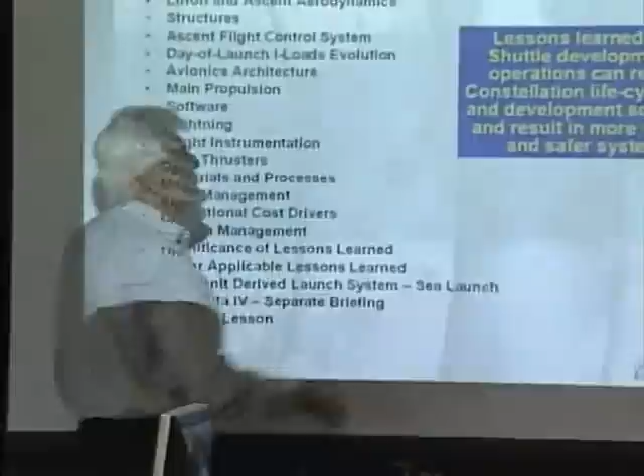The whole idea in this thing is, these lessons learned, hey guys, you NASA paid for it already, for these painful lessons. Don't pay for them again. This is like a map to a minefield. I come here with all the bloody legs, and I said, find your own mines to step on. Don't step on the same mines. So that was the whole idea, to give you a little bit less expensive, a little more reliable, a little safer system.

But if you ask me, did it make any difference? Hell, I don't know. Maybe a little bit.

Okay, so let's go. So mainly problems, some success stories were included. And by the way, I'm talking about things I knew about. Some people say, well, why don't you include station? Well, my involvement in station was peripheral. Why didn't you talk about Apollo? I said, well, hell, I was in Poland, minding 2 cows that we had in our little farmette, so I don't want to talk about things that I didn't experience. I'd rather limit my conversation to things that I know about.

This is shuttle and a little bit of Sea Launch, because Sea Launch brought some things that we could have learned, but I'm not sure we have. I'll probably go to my deathbed one day thinking I should have given more of these damn briefings to NASA, but okay, let's go.

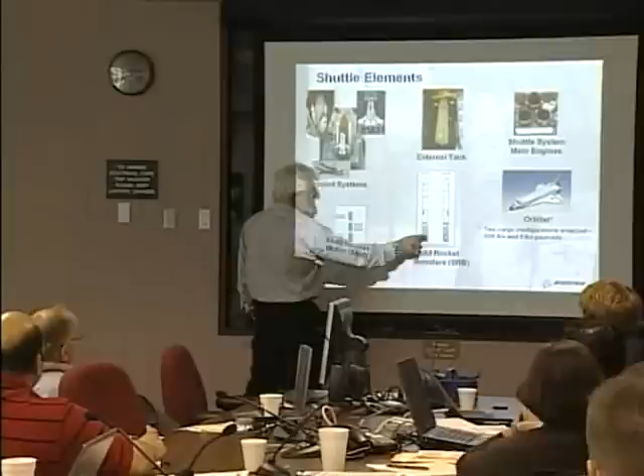If you look at the shuttle elements, there is some real commonality with Constellation. The booster, when you ignite it, you have the same physics happening as it did on shuttle. It's a different configuration, but there are some things that are very common, and the lessons are very applicable.

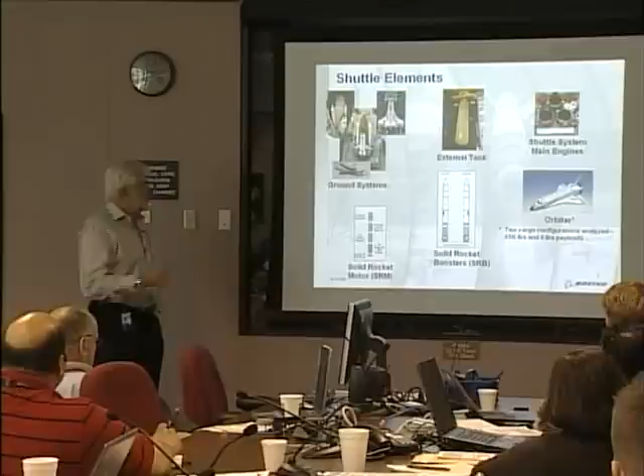So, okay, let me go through the first technical area I'm going to look at, and this is from my original briefing. We have the finest aerodynamicists from Rockwell and NASA. We did not have 10 centers involved, but we had Marshall, JSC aerodynamicists, and our own. So we do all this analysis, we do all this testing, and then we fly.

And we actually broke the vehicle in one area. We had this huge overpressure wave hitting the vehicle, and we thought we had it attenuated. We had water injection, and so we actually - there's a 38 or 39-inch nitrogen tetroxide tank in the forward fuselage where we buckled one of the struts holding it because of the dynamics of the vehicle response due to this overpressure. We did not fail it. Can you imagine trying to fly ascent with this thing rattling in there? I was kidding - they're saying God must be American because we screwed up, but he protected us from our ignorance.

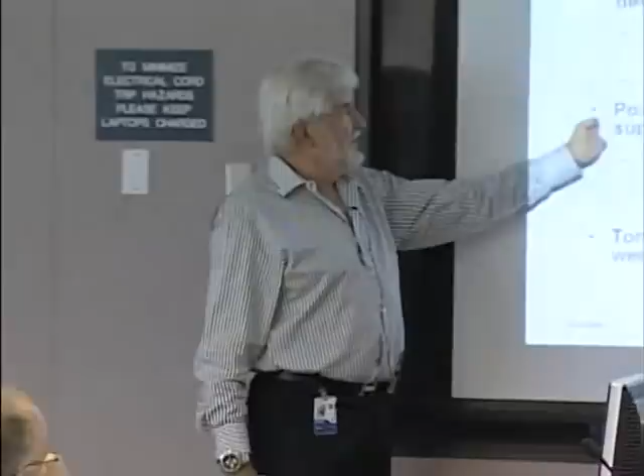So anyway, we survived the flight, we landed, and then we found that our finest aerodynamicists simply misread the source of the ignition overpressure.

In typical response to a problem, we created this wave committee with NASA and contractors. We had this model at Marshall. Marshall was involved very much, and I think you'll see this lesson is used in getting ready for the Ares flights, simply because transferring information is sort of like playing a contact sport. If you're involved in it, you get the knowledge. If you're not involved, it's up to you to go to somebody's shelf or computer and extract it. Marshall was in it, so that lesson is with them on Ares. But we finally fixed it.

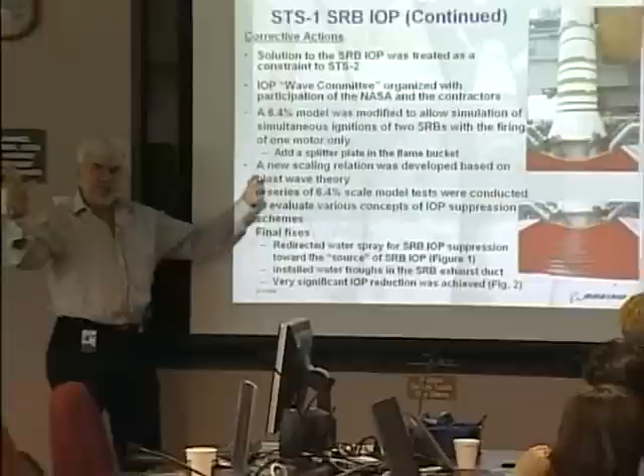We put those water troughs filled with water that absorbs some of the thermal energy and also the energy from the wave, and we reduced it. We solved the problem between STS-1 and STS-2.

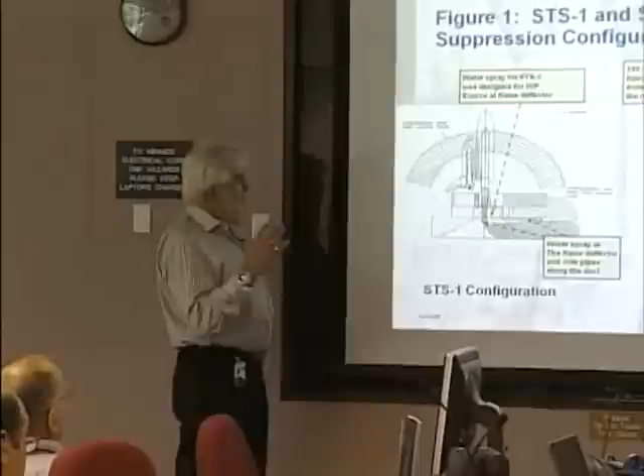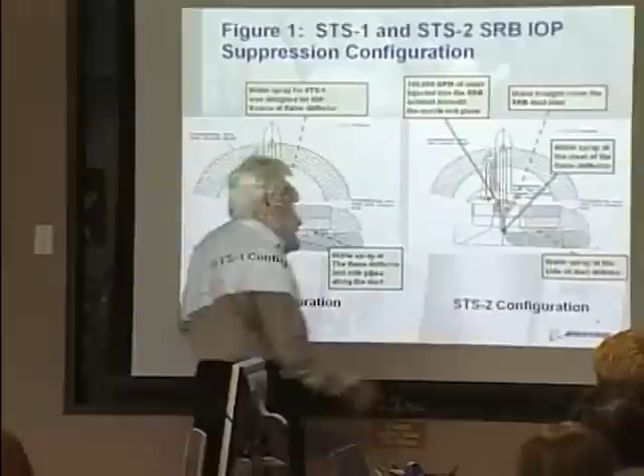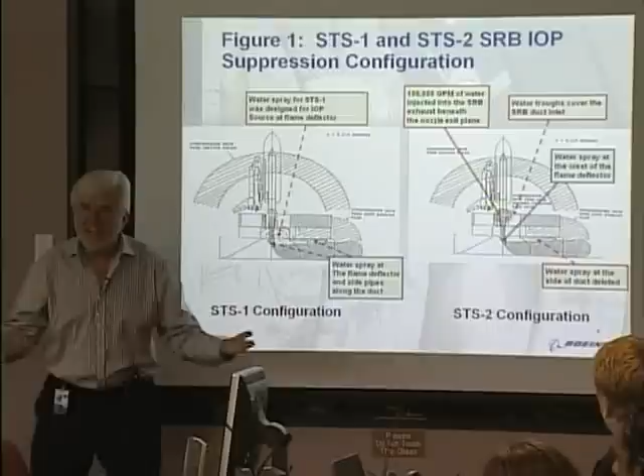But the key mistake was that all the analysis showed the source of the ignition overpressure wave was going to be at these 90-degree turns, where the gases hit the floor and turn, coming back as a big wave. Well, STS-1 showed us the source of the ignition was different. We had all the water injected in the wrong place, and we almost broke the vehicle. Once we learned the source of the overpressure wave was just at the exit plane of the SRB, our finest aerodynamicists looked at their shoes for a while and concluded, yeah, we just screwed up. We were wrong.

Another thing is a compromise was made. Tomahawk was a little solid propellant rocket used to characterize this, measuring PC rate rise and what it means to aerodynamics, the pressure wave. It turned out that the little Tomahawk motor had a different characteristic from SRB. But it was compromised, and people said, well, that's all we've got. Well, what we had did not represent shuttle, so we almost broke the vehicle.

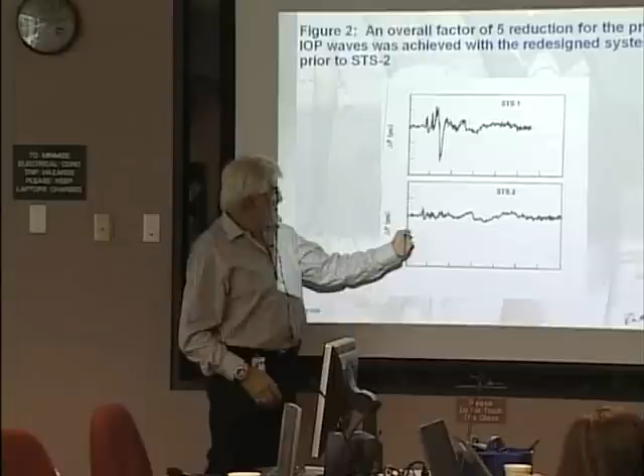Okay, so let's go past it. This just shows you, somewhere on the body flap - export compliance people had me remove some scale so some enemies don't figure out what we did - but anyway, this is STS-2, pressure across the body flap, and this is STS-1.

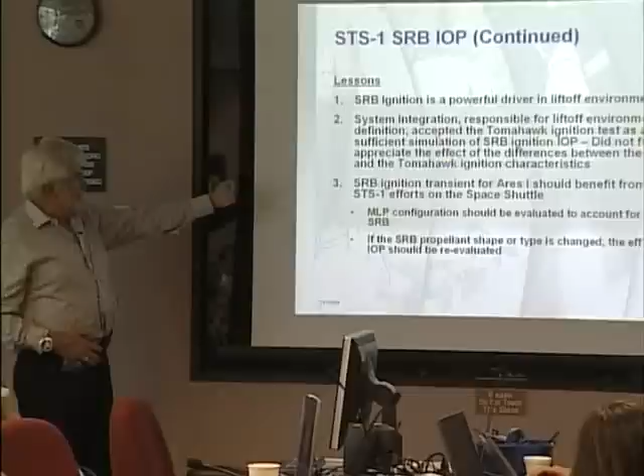So it's a big driver in lift-off environments, and for Ares, it should benefit from what we have done. And if you change the MLP or propellant properties, you've got to do something, you've got to relearn this thing. So let's take a look at how I see it on the next chart.

I think this contact sport of us playing with Marshall guys had them continue MSFC involvement, so they know about all of this. For example, I know that for Ares 1X, which uses the same MLP as we flew, they're actually going to go with the same protection - a 4-segment SRB, water trough, water injection in the same place. So that piece of knowledge was transferred, simply because people were there with us. Utilization of legacy hardware makes it easy. So that lesson learned is applicable and it's being applied. That's easy, that's a good one. Let's go to the next one.

Okay, another one we also had in STS-1, it was a big deal that could have failed the vehicle, but it didn't, because somebody was looking after us. Remember that? We had plume simulation trying to get the aerodynamics at ignition and during flight. A compromise was made - hot plume test is expensive, you can only do it for short periods of time because you burn out your facility. So they say, well, cold plume is close enough, probably, most likely. That's another aero thing - I hope none of you guys are aero guys thinking I have grudges against aero guys.

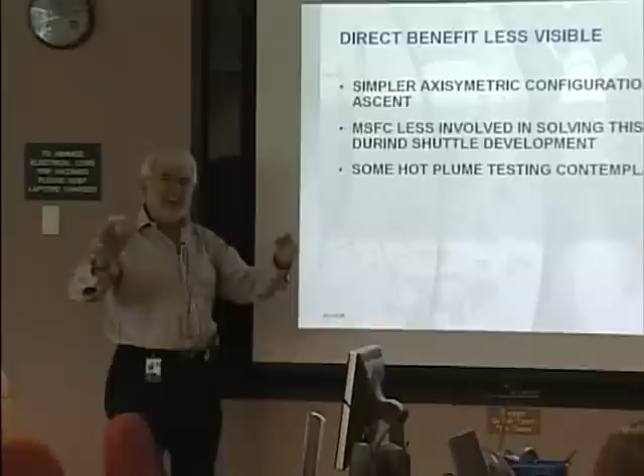So on the next chart, what I see is, okay, you've got a simpler axisymmetric configuration on Ares, so it's maybe less critical than shuttle. Marshall is a little less involved in this, so on the Ares side I don't know how well they are doing learning from our experience, but I was happy to see, because the Orion contractor is a JSC contractor, and JSC was down in the mud with us when we were working the problem.

I think hot plume testing is contemplated on Orion. So at least the way I see it from my knothole, the transfer of this experience through JSC to their contractor has occurred. It's not all that clear how it is with Ares, but there it's somewhat less important. For whatever it's worth, I gave my briefing to the guys on Ares about 3 or 4 times, so hopefully they will do enough, considering their challenge is a little less.

Go ahead, next. Okay, the next one is structures area. Go ahead, next chart.

This is one thing, and I don't want to claim credit for shuttle teaching constellation anything here, because sometimes right things happen and they look correlatable, but they're not. They're just smart people doing the right things. But throughout shuttle development, especially orbiter, we were always maintaining 1.4 safety factor, and we never had any additional margin, our structures guy, loads guy, dynamics guy.

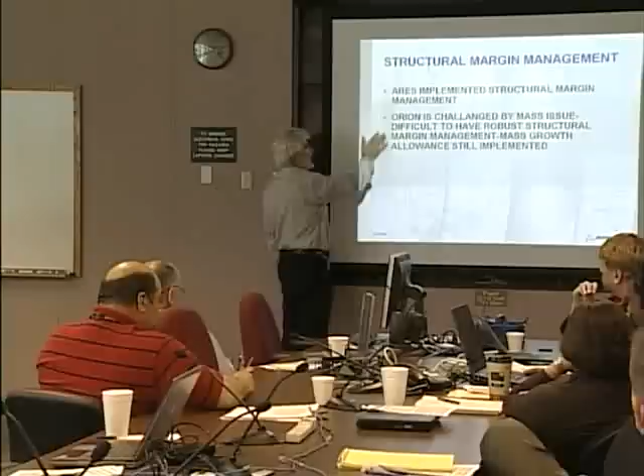And Orion is in a tougher spot because they're really struggling with weight. But regardless, they actually do have this mass growth allowance implemented, which we didn't have on shuttle. So, if I was a little more arrogant than I am - I'm a pretty humble guy - I would say, oh see, they learned from us. No, I don't know if they did, but they are doing better than we did in structural margin management.

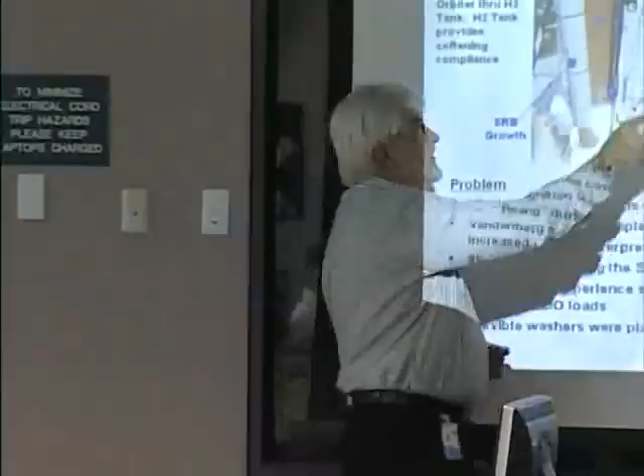Okay, the last area is lift-off loads, and this is just in a nutshell: what happens is, when you ignite the solid, the SRB grows instantaneously, a matter of milliseconds, growing by nine-tenths of an inch. It just grows because of the internal pressure. And so the way you accommodate that growth, the MLP deflects a little bit downward, and the rest of it jerks the forward interface.

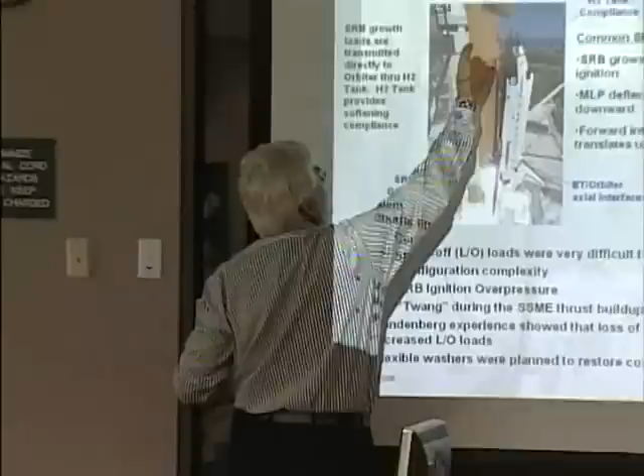For shuttle, this load - the forward interface is in front, this is where you take axial load. So then you go through this big hydrogen tank spring and dump these loads to the orbiter. So the orbiter is being propelled by these growth forces indirectly.

Question about the last one - I'm guessing the real lesson from that factor of safety discussion was, over time, as you saw more data, you realized that your models weren't as well founded as you thought initially, and you miscalculated the loads and the factor of safety, so you had to keep going back and adjusting.

Right, yes. So the lesson learned maybe is that this reliance on physics models and analysis, and how there's so much uncertainty in there, and that real data and experience helps you realize that. Yeah, that's another way to look at it. You have a right way of looking at it, I just said it my way - but besides being wrong for a reason...

I mean, one reason is because maybe you are ignorant, you didn't do that stuff right. But another thing is that as a program matures, you do testing, and you discover things in tests that are a little different than expected. So you tweak the models, and then you do aero testing, wind tunnel testing, more sophisticated wind tunnel testing. So there's a growth of knowledge and precision, and all of that cumulatively affects how well you predict these loads. There's probably more than one way to state the lessons learned.

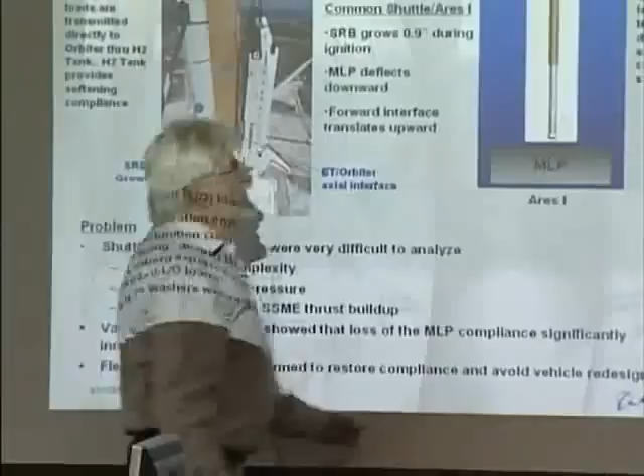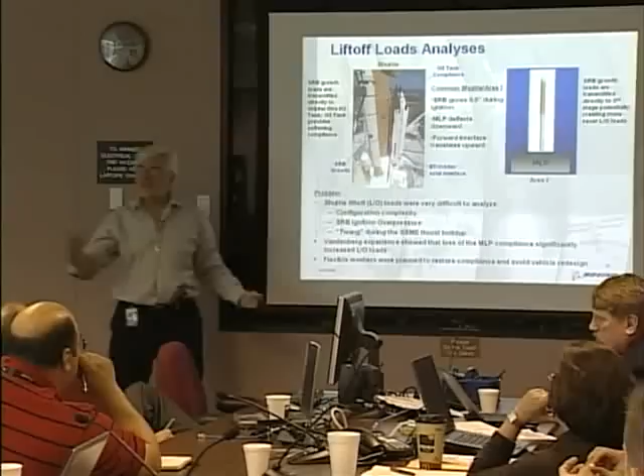So anyway, where did we go? So Ares - the growth of the length of the casing gets immediately dumped to the second stage. I was cautioning at that time, I said, by the way, this took us 3 years on Shuttle to do this right, and we learned all kinds of things. This is much more complex than that - that one is more susceptible because of the close connection between growth of the solid and the second stage.

But we also learned another thing at Vandenberg. It took us like a year of grinding, churning out these Cray computer runs, to find out that if you go from a soft MLP to a rigid pad at Vandenberg, your loads go up by like 30 or 40%. So when I was briefing that, I said, when you guys redo your platforms for Ares, especially Ares 5, please pay attention to that. Don't get surprised, don't start putting concrete, and then a year later have your analyst tell you, oh gee, you can't fly because your new loads are 30, 40% higher.

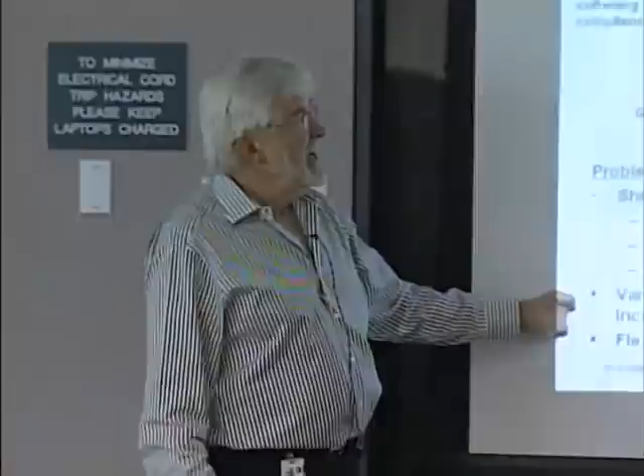But I think they know this. Here again is a contact sport with the Marshall guys - they were party to solving this problem. Before we go to the next chart, let me point out one thing: when I was doing this, I was cautioning about this liftoff problem. Well, that hasn't turned into a rage.

What has turned into a rage is the response to thrust oscillations. Because of this close coupling - thrust oscillations in flight is no big deal for Shuttle, it's a different kind of coupling, different dynamic property. Here you've got this straight, exciting axial mode of the second stage by these thrust oscillations. So that's where they got bit, not at liftoff, but because of the same configuration concerns.

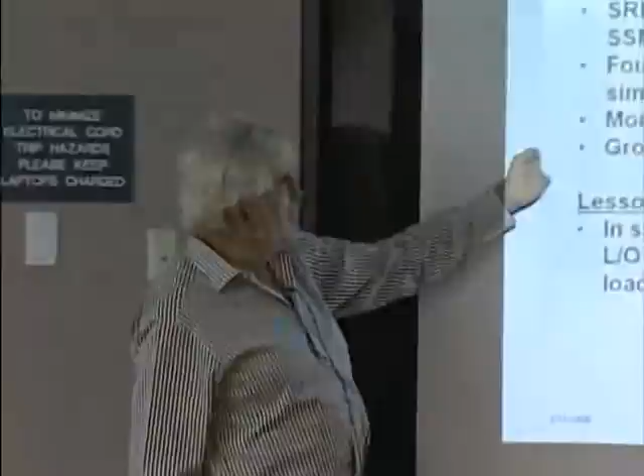So I guess I already told you, we solved that problem. These charts are almost 2 years old, and the lesson was: in spite of the relative configuration simplicity for Ares, liftoff loads may be a significant design issue. Well, it turned out they handled that right, but they got bit on these thrust oscillations, again because of configuration.

So what do I see? Marshall again was involved in liftoff loads resolution, so there's continuity of knowledge, and they're in charge of all these Ares analyses, so that works pretty good. They are sensitive to the MLP stiffness, which is good. And the guys at KSC likewise - I harped on that. I said, when you guys start looking, please pay attention to compliance of the new platform, so you don't hit the flight hardware with too stiff a platform.

By the way, you can't make it too soft either. If you make it too soft, the thing will be too susceptible to winds, so it's a tricky thing. But at least we are conveying those things, and sometimes it sinks into people's minds. Also, the forcing function for liftoff - the forcing function definition took us forever to get right. You see this big cocoon where you have pressure growth.

Some of this pressure pushes on the forward bulkhead, some of it goes out the hole, some of it pushes on this partial aft bulkhead. It took us forever, and I actually recently had a guy ask me how they do forcing function. They do it exactly like we did in the shuttle, finally, after struggling with it for a couple of years.

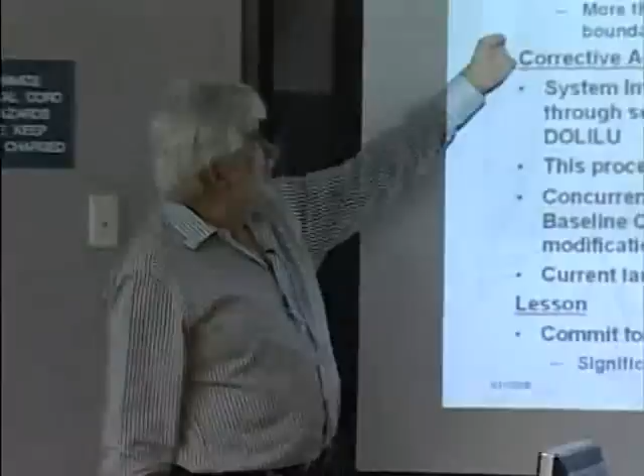So corrective - okay, we led this, and I call it evolution. This is like a 20 year evolution. We started design in a very naive fashion.

We call these synthetic winds. We ginned up some winds from measured winds, and we collapsed them into a handful of synthetic winds, and that's how we designed shuttle to fly through high Q. And then the Marshall guys show up with like thousands of measured winds, and we started to use those measured winds, and we couldn't fly through most of them.

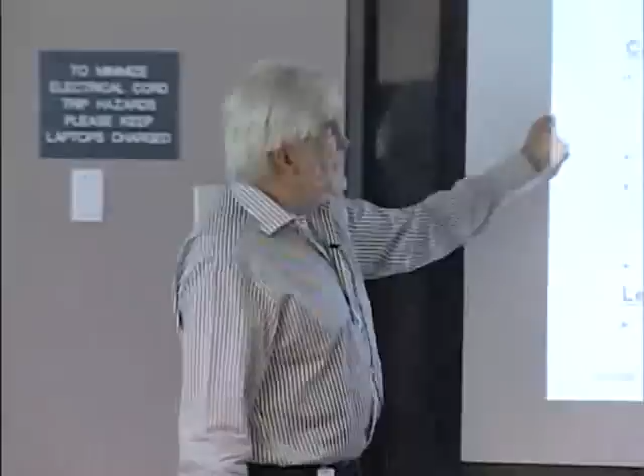And by then the orbiter is designed, the rest of the hardware is designed. So we let this - so we finally found, okay, what it really is, is that winds vary a lot. Sometimes they blow this way, sometimes shear content is like this, sometimes gusts are like that. So they're all different.

And what it boils down to is you would like to know, on a day of launch, what does a wind profile look like. But if you design something for generic winds, you have to really design for the broad range of winds, and that gives you either a heavy structure, or very low launch probability. Well, in our case it was very low launch probability. So we went through this process.

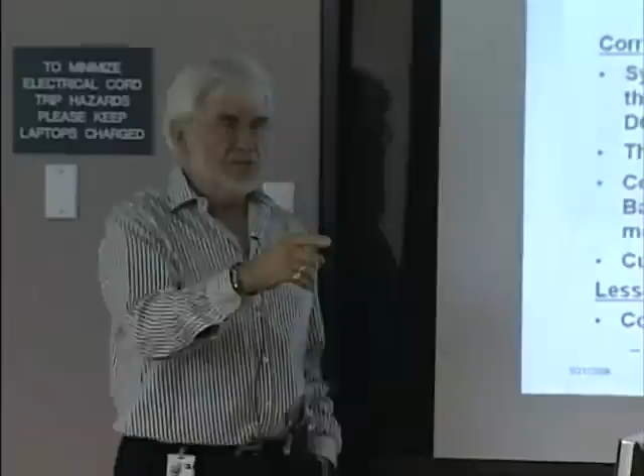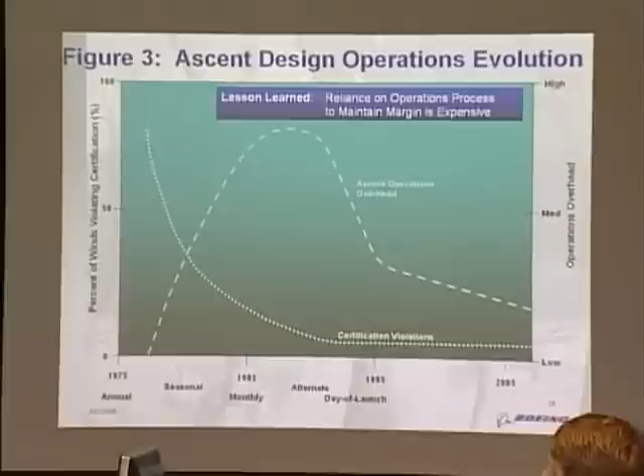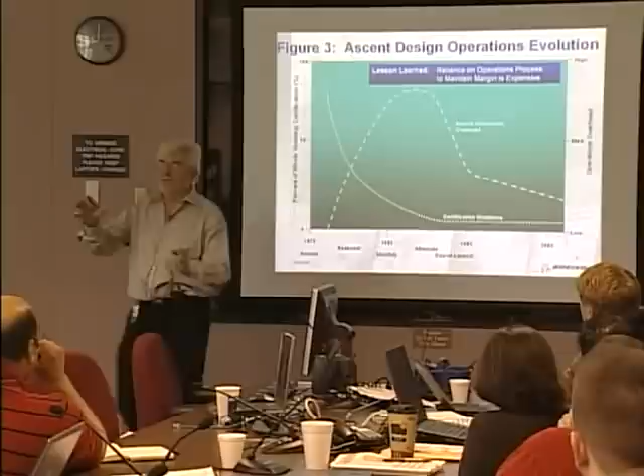And then we finally came to what's called alternate. You guys may not know what I'm talking about. Now, depending on where the winds would blow on the Q-alpha, Q-beta profile, we designed 9 trajectories. And this shows what it does to the cost.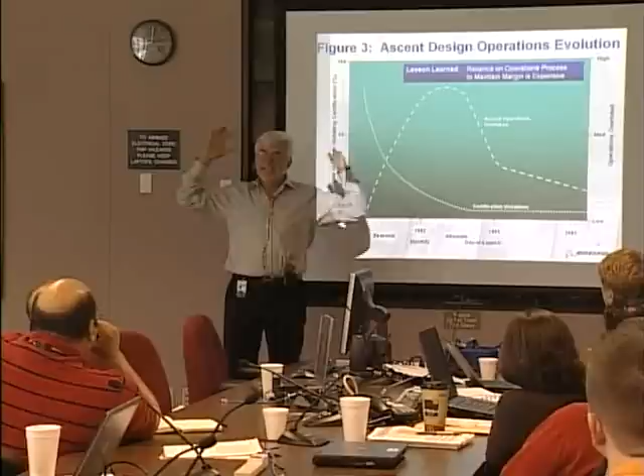You have to certify 9 sets of trajectories, so that on day of launch you measure wind with a balloon and you pull the one that is closest to any of those 9. So this is like a nightmare, you know, from a program management and paying-for-it standpoint.

It was terrible. So we finally got this, and this is where it was like an emotional, big step - how do we convince ourselves and NASA, our customers, that it's okay to, like, a few hours before launch, have enough confidence to do these day of launch I loads. In other words, design the trajectory to fly through high Q on the day of launch.

And we finally did it. We had some independent processes checking one another. But today it's state of the art. There's no suspense anymore, and they are using it. So what it means is, winds - and that's what I actually recommended in my briefing two years ago.

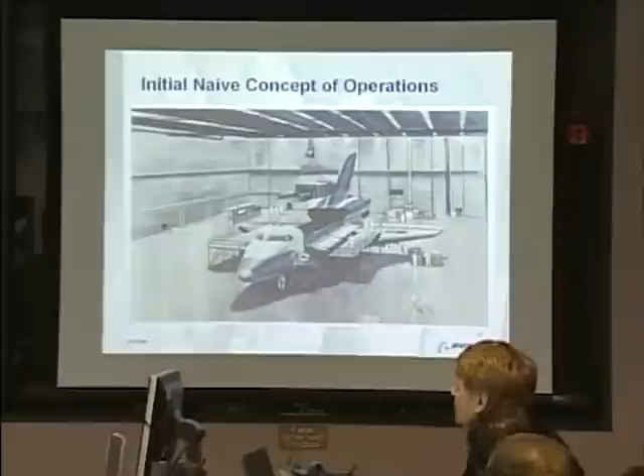Interestingly enough, and I don't want to be rambunctious, but the new schematics of some of the processing of the Constellation hardware look just like this. Somebody showed me that the other day - 'hey Bo, here's your picture number one for payload processing at the Cape.'

If you guys have been to the OPF, this is symptomatic of why it takes 17,000 people to operate the shuttle.

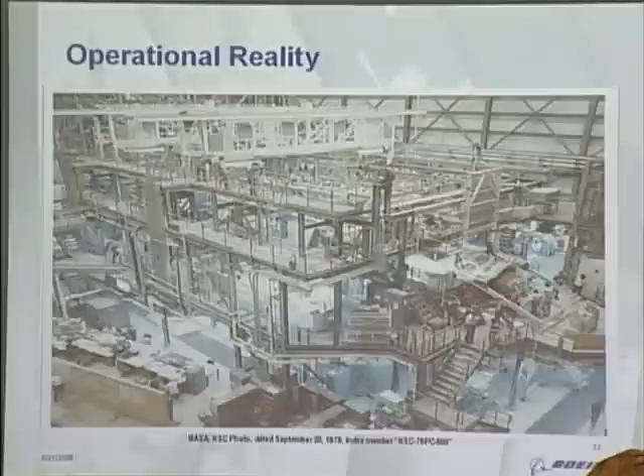When I first showed these two charts to De Castro, who was running the program as USA manager, I said, Howard, don't be hard on yourself - this isn't a reflection of how you guys operated, it's a reflection of how we designed it to be operated.

We designed it so dropping the landing gear is like giving birth to a kid - so complicated it's like you need a team of doctors around it. The tiles, the seals, are so complex you can't just drop the landing gear and pick it back up like you do an airplane. It wasn't designed to do that. Access - I mean, it's all on and on and on.

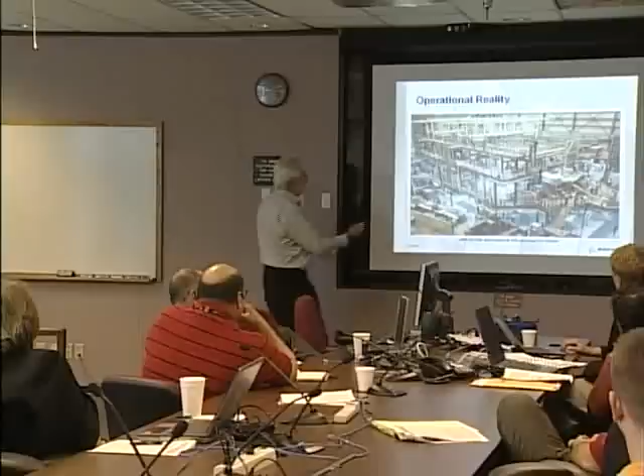And the question is - I'm going to talk a little about what I've learned, and I'm not sure I was able to convey this to anybody at NASA, from Sea Launch. The Soviets have done something completely different, and I'll talk about it. But anyway, this is a dilemma that we have created.

We think we're designing something, then we send it to the ops folks and say, well, they're smart, they'll figure out how to do it. Well, of course they will. And that's what they wind up with - that's what has been eating NASA's lunch: $4 billion a year, 17,000 people. The touch labor hours to turn around an orbiter is about 500,000 hours, if I remember.

And I guess you can do your own math with your contractors' rates.

It happens - I just read in Aviation Week that for the Joint Strike Fighter, maybe they'll get on the learning curve and it'll improve over time, but they estimated the hours to produce a wing for the F-35 at 100,000 man-hours. A wing! Yeah, so I mean, it happens.

Well, I've been away from it for a couple of years, but the last number I remember was 500,000 man-hours for the standard processing of an orbiter between flights.

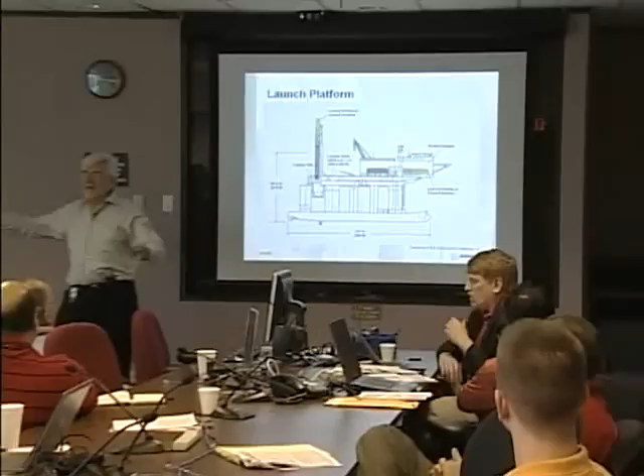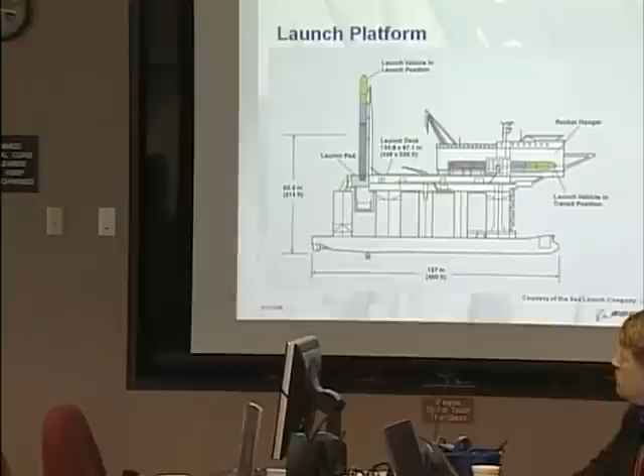Let me talk a little about Sea Launch, because I know about it - I worked on it for 5 years. It's a modified platform from which we launch - a complex of two ships. I haven't been out to it for 6 years, from the Equator. By the way, the first two stages were the last modern rocket developed in the Soviet Union before it fell apart. First flight was 1985, and the Soviet Union - Reagan pushed Gorbachev to throw in the towel around '90 or '91.

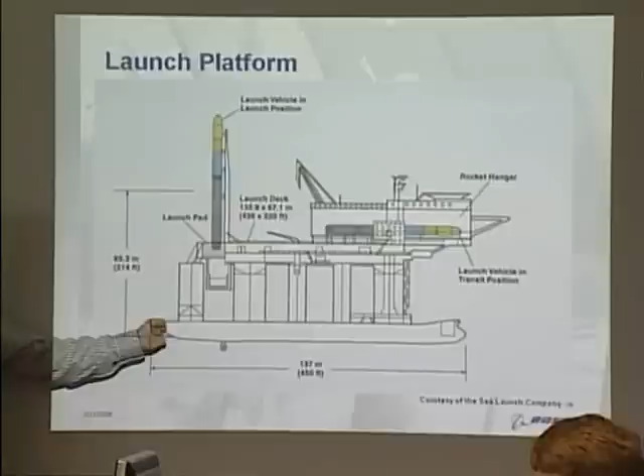So this is a platform, and we built a brand new ship in Glasgow for the other ship in the complex. And the Ukrainians were the providers of the first two stages. Now, this is not some kind of rinky-dink rocket - it uses kerosene.

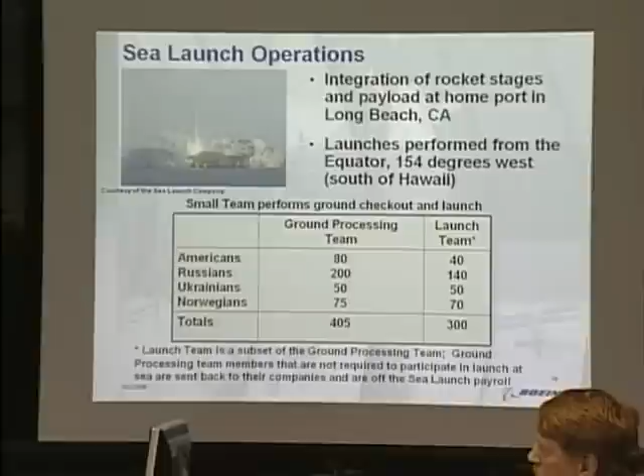I want you to listen to this, because when I talked to Scolese the other day about it, he said, wow, this is great. And then Bo goes to Houston and falls asleep - takes naps during the day - and Scolese gets busy doing something else. But I said, the Soviets built a green rocket 20, 25, 30 years ago that has no hydraulic fluid generation, which normally we use hydrazine for. And if somebody wants to know, how the hell can you control a rocket without any of that? Well, they did. It takes the Ukrainians only 50 people at the launch site.

The rocket was designed, just one example. Instead of fueling 3 stages separately, you have a little plumbing inside the rocket that comes to a single umbilical. All the pneumatic controls, they use much more pneumatic controls than we Americans do, and they run to the same umbilical. Same thing with electrical wires, a little additional wiring, and you come up with a single T0 umbilical.

You know how many umbilicals we have on Ares? I think 9. I was briefing this at Cape, and some kid comes to me and says, Mr. Baymo, that's a very nice briefing, let me show you this picture of Ares - 9 manually connected umbilicals, for which you have to provide scaffolding, bring facility designers, bring facility contractors to build the stuff. So here we are chewing up precious NASA money on ops, getting ready for ops, because we didn't want to put another 30 pounds of plumbing and 15 pounds of wiring inside the vehicle, because we are performance starved.